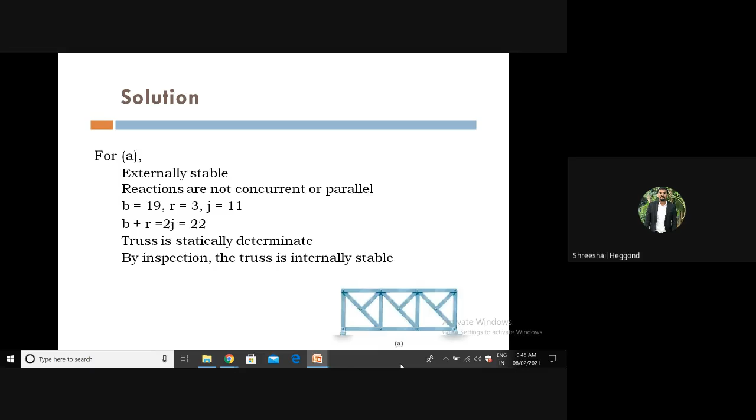And determinate structure from the calculations. Next, second diagram. The second is also visible to you people, I think.

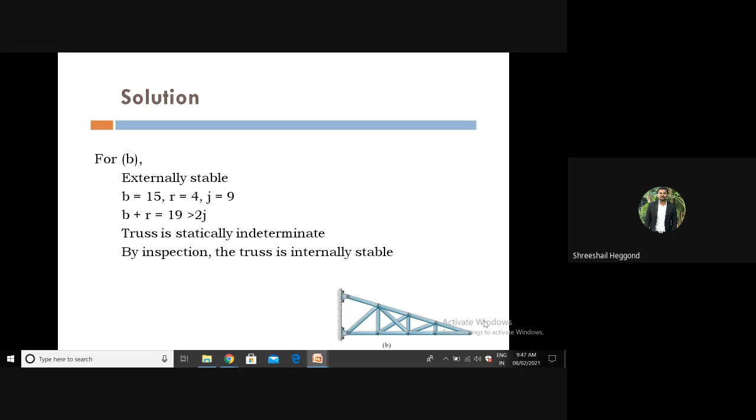Next, the third diagram: you can see the bottom chord and top chords where there will be 3 members, and in between a triangle is there, for that 3 members, and connecting members from supports are 3. Therefore, total 9 members are there, or 9 bars.

Reactions will be: one is hinge and one is roller support. If you see, left hand side is hinge support and right hand side is roller support, so it will be 2 plus 1, giving 3 number of reactions, and joints are 6 wherever the nut bolt system is visible clearly.

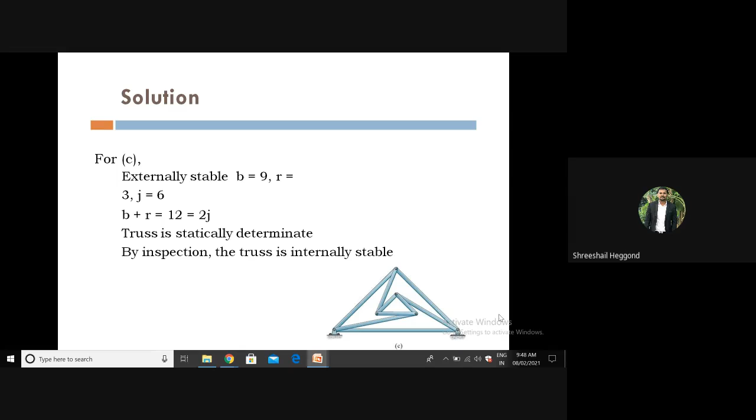3 top corners and 3 inside triangle corners, giving total 6 joints. If you see, B plus R equals 12 and 2J is 12. Therefore, it is a statically determinate and stable structure.

Next, the fourth one is the rectangular truss, where if you see the number of members, each joint to another joint will be a separate member. Therefore, if you see the rectangular members only, each side has 2 members, giving 8 members, and inside...

No, it's not a pentagon, the 4-sided member is there, that will be of 4. So total is 8 plus 4, which is 12.

And reactions: one is roller, one is hinge. The top one is hinge and bottom one is roller support, giving 3 reactions, 2 plus 1, and number of joints are 8.

You see the external surface only, internal there is no hinge, all on the external surface only. Each member is having 3 joints. If you see, totally it will be of 8 joints.

3 on the side, 3 on top, 3 on bottom, in between 2, that gives 8 joints. B plus R is 15 and 2J is 16.

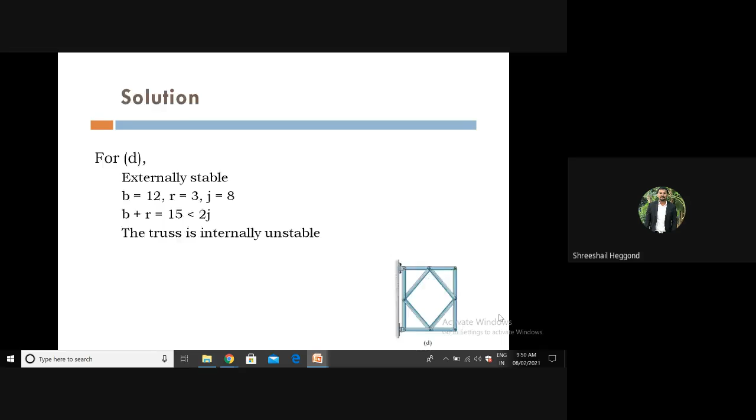Next is determination of the member forces or analysis of coplanar trusses. That will be done by 3 methods: method of joint, method of section, and graphical method.

For your syllabus, only two methods are there, that is method of joint and method of section, that is the Ritter method. The graphical method is not included in your syllabus, but we'll go through how it is done, for beyond your syllabus.

First one is method of joint. In method of joint, as analyzed in mechanics numericals, you used to consider the corner of any structure and find out the x component and y component by considering the inclined member using sine and cos theta values.

You used to find out in mechanics the horizontal member reaction as well as vertical member reaction. In this method, satisfying the equilibrium equations for the forces exerted on the pin at each joint of the truss will be calculated, and application of equations yields two algebraic equations that can be solved for two unknown values. First, identify the joints where only two unknowns exist by considering the equations of equilibrium, that is summation of fx and summation of fy. You can find the force in those two members by considering two unknowns and two equilibrium conditions.

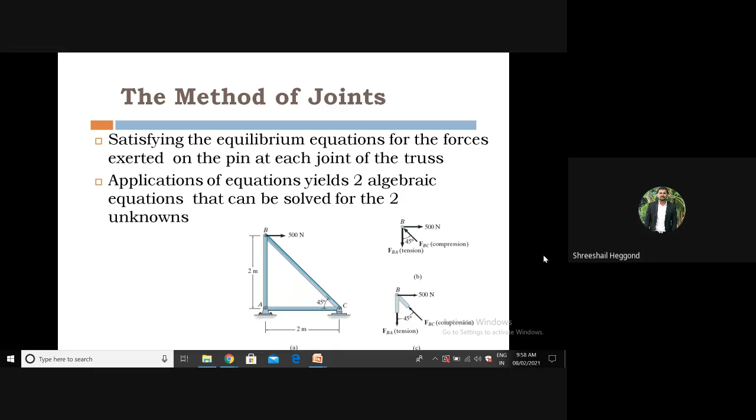But for a horizontal member like AC, there is also a different kind of activity which we need to learn to find out whether it is a compression member or tension member. If at B the load is applied in the right direction, at A the reaction will be in the opposite direction, that is towards the left. Therefore, the AC member is also in tension. That will give the inspection value.

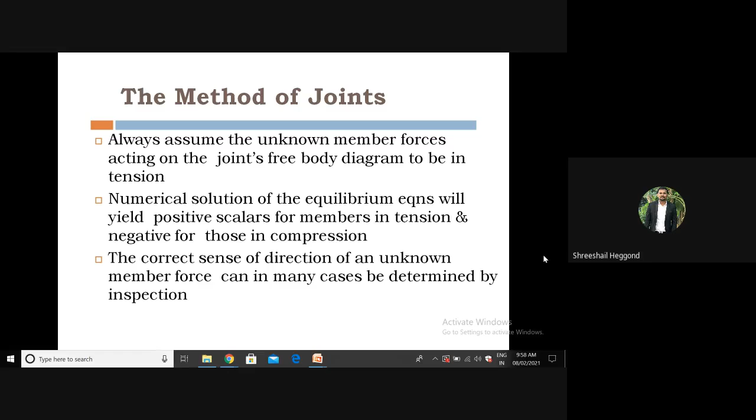Similarly, we need to find out whether the member is in tension or compression by looking at the diagrams. The correct sense of the direction of an unknown member force can in many cases be determined by inspection. Fourth point: a positive answer indicates that the sense is correct. If after solution your initially assigned value comes out negative, then your indication is wrong, or your force is acting in the opposite direction.

Initially, you may assign any component as tension or compression, but once the solution is done, it depends upon whether your value is positive or negative. If you initially assumed the member as negative, or a compression member, and you get a positive value, then keep it as it is. If it comes as a negative value, then you need to change the direction to tension, not compression.

Similarly, if you initially assumed the member as tension and solve the numerical, and you get a negative value, then you need to change the direction. That will become compression instead of tension. Whereas a negative answer indicates that the sense shown on the free body diagram must be reversed. That is, the direction has to be changed from positive to negative and negative to positive.

One numerical is given for finding out whether a member is in compression or tension depending upon the joint. Note down the diagram; we will be solving this numerical and finding out whether the members are compression members or tension. Determine the force in each member of the roof truss as shown. State whether the members are in tension or compression. The reactions at the supports are given as shown: 4 kilonewton and 4 kilonewton.

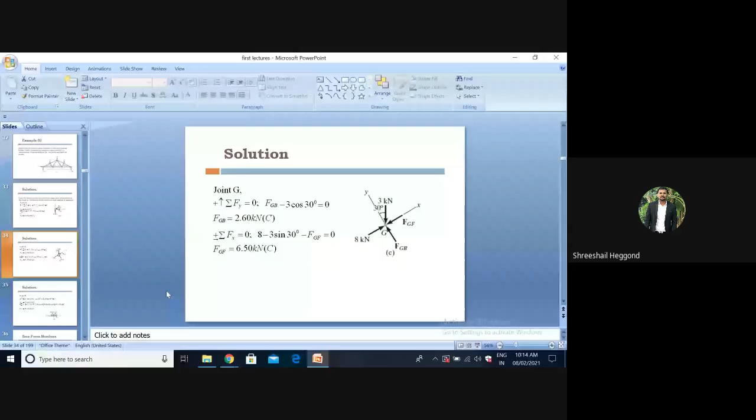For G, that is FGB is 2.6 and FGF is 6.5. Next, you can calculate for F or for the member at the bottom, that is B point. For B point also there are 4 members joining. At the F point also there are 4 members joining. Now the FGF is a known value, which is equivalent to EF because it is a symmetric structure. Only 2 unknowns will be FBF and FBC, and you need to find them out.

If you consider a point, the horizontal value is known, the inclined value is known, that is BG will be known. FB and BC are the values that you need to find out. Third point you can consider to be the B point. Summation Fy equal to 0 for finding out the vertical members. One is 2.6, the inclined member, and 6.93 is the horizontal member. That is, one is tension and the other is compression.

If you consider joint B, summation of Fy can be written as FBF, that is the inclined member on the right side, sine 60, which is the vertical component going upward, minus 2.6 sine 60, that is acting downward, so it will be negative. Equating both, you can find out the value of FBF, that will be 2.6 kilonewton in tension, which is the same as this inclined member, 2.6, that we previously calculated.

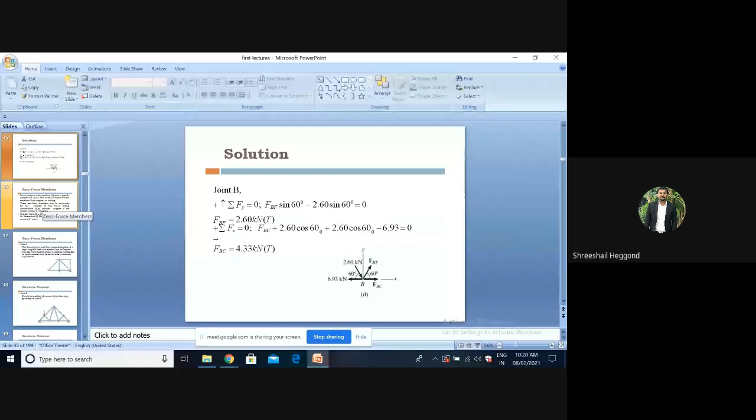Once you're done with this solution, we'll go for finding out the zero force members in the truss. The truss analysis using method of joints is simplified if one is able to first determine those members that support no loading. These zero force members may be necessary for the stability of the truss during construction and to provide support if the applied loading is changed. Some of the members are introduced in trusses to make our structure stable.

There should not be any lateral movements or movements in the trusses, therefore there will be zero force members. That will provide support to the loading conditions. If the loading condition changes in your structure, in such cases, this type of zero force member will be helpful for stability of the trusses.

The zero force members of the truss can generally be determined by inspection of the joints. They occur in two cases, case 1 and case 2. Case 1, where two members at joint C are connected together at a right angle and there is no external loading on the joint. There is no extra load on joint C, but both members are at right angles to each other, 90

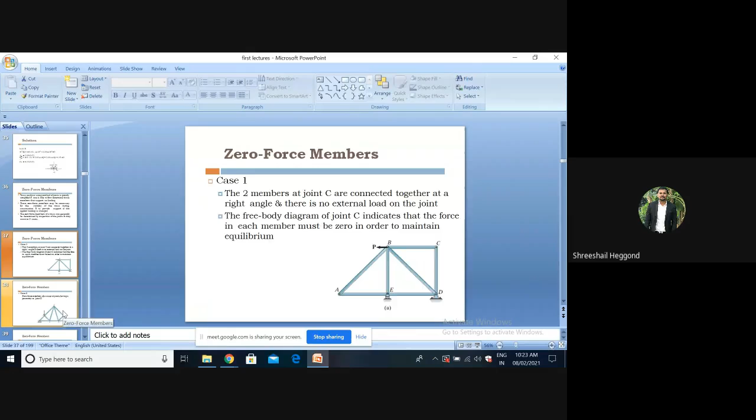degrees. The free-body diagram of joint C indicates that the force in each member must be zero in order to maintain equilibrium. If you see the summation of Fx and summation of Fy, the equilibrium condition for the free body at joint C, to make it zero, the vertical member will not have force and the horizontal member will not have force. Those are the zero force members.

We'll be solving some numericals on that basis so that you can easily identify the zero force members. In case 2, no external load acts on the joint. So a force summation in the y direction, which is perpendicular to the two collinear members, requires that FDF, the inclined member, will be 0. Both members join at one point, and if you consider summation of Fy, the equilibrium condition in the y direction, you will get the value 0 in the inclined member.

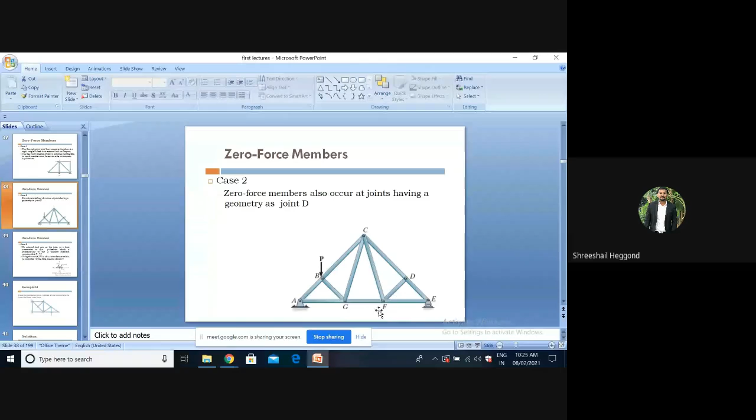Only at point B a load P is applied. The remaining truss has no other external loads. Therefore, on the right side, all inclined members should satisfy summation of Fy equal to 0, so inclined members become zero force members. No vertical force is applied there, therefore there will be no reactions in the members, creating zero force members. Summation of Fy is equal to 0.

If you write the expression, FCF sin theta plus 0 is equal to 0. If you equate that, FCF is also 0. Since sin theta is not equal to 0, it will have some other value. If you equate it to 0, then FCF will be 0.

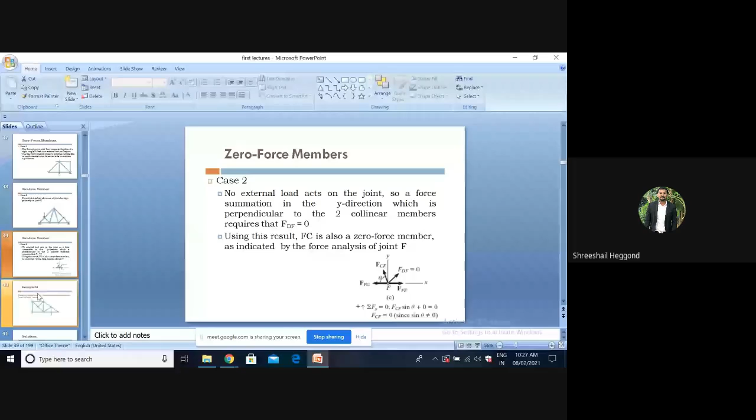The angle may be anything. If you have inclination in the member, there will be some angle. That cannot be zero; if it is zero, it becomes a horizontal member. Therefore, when the member is there, theta value will be there, meaning the sine value will exist. To make the equation zero, FCF should be zero, since sin theta has some other value. This is how we find the number of zero force members.